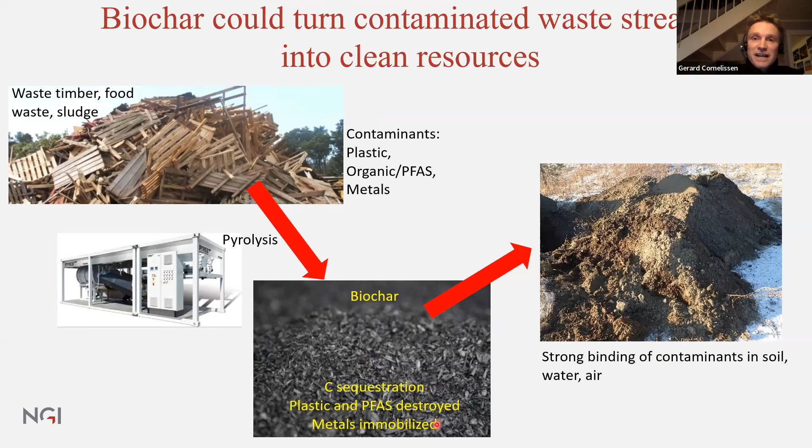There's a lot of organic waste in Norway, and it won't be different in the US, only you can multiply the numbers by 100 probably, because we only have 5.5 million inhabitants. Waste timber, surprisingly, is 660,000 tons per year for only 5.5 million people. Garden waste, we have a lot. Forestry residues, even more, but more or less clean.

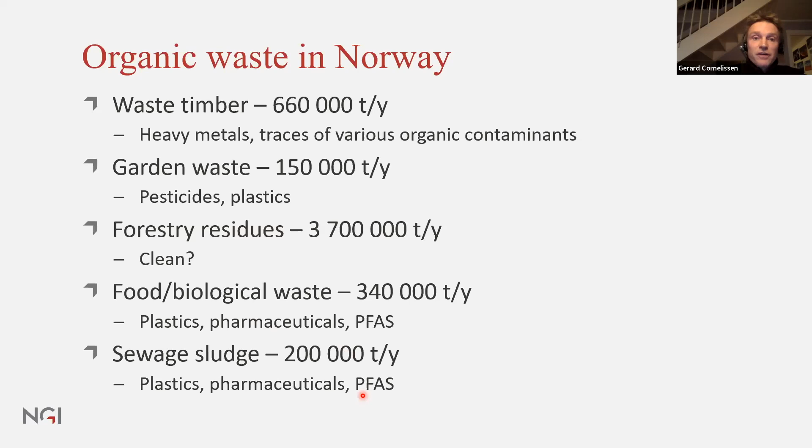Food and biological waste is 340,000 tons per year, also including plastic, pharmaceuticals, and PFAS. The same is true for sewage sludge, of which we have 200,000 tons per year, and that is getting more and more problematic once we find out how problematic these PFAS compounds are. I will show you how problematic it actually is to spread sewage sludge on your agricultural soil. You should definitely not be doing that. It's not a good idea.

This is the project that we got, the VOW project, which stands for Valorization of Organic Waste, VOW.

So inspiring that Paul's company was called after the project acronym.

That's great. We want to make that organic waste into sustainable products, biochar products for cleanup of contaminated water, soil, and air. So plenty of partners, even one American partner, University of Florida, that's Andy Zimmerman in Gainesville.

I want to mention the Technical University of Denmark, top one in the world when it comes to LCA. They will do an LCA of pyrolysis treatment as an alternative treatment to regular practice for these various organic waste fractions: garden waste, waste timber, sewage sludge, and food waste. Subjected to pyrolysis, then you get biochar, syngas, and bio-oil.

Nothing new for most of you, I think. The biochar then you can use for water and air treatment, for treatment of contaminated soil, soil improvement, climate change mitigation, and also treatment of waste before landfilling it.

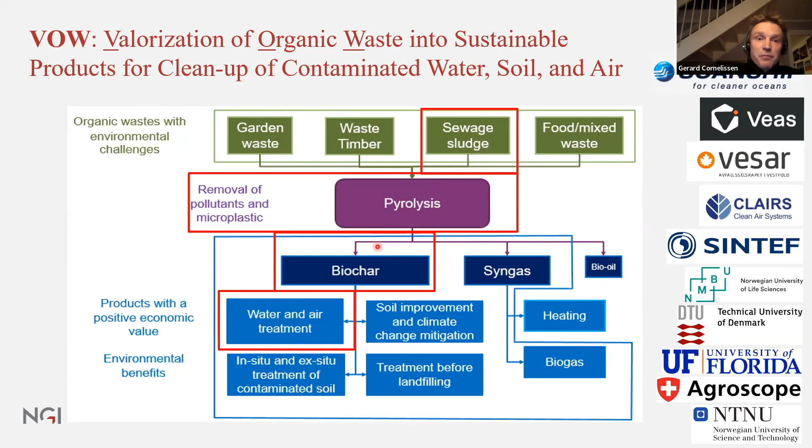The syngas you can use for heating and for obtaining biogas. The main focus of this talk and of our project is then the sewage sludge pyrolysis, biochar, water and air treatment value chain.

I will have to give you a little crash course on PFAS, 5 minutes. I'm teaching in the subject, so it's very nice to share that knowledge. These so-called forever chemicals—what is so bad about them, and why are they such a big threat to our food and drinking water? This is the general structure for the non-chemists of you.

The carbons are at these intersections, so it's 1 to 8 carbons. This is an 8-carbon carbon chain. All the hydrogens have been replaced by fluorines—that's why you call it perfluorinated, meaning totally fluorinated. And then you have this sulfonic acid head group. So basically all these PFAS compounds, which is the joint name for all these compounds, have a hydrophilic head group and then a tail which mostly consists of carbons and fluorines.

Here is also a picture of the Oslo Airport firefighting training area, because firefighting foams, especially the old ones—now forbidden—are a big source of especially PFAS, but also many of these other compounds.

What is very nasty about them is that they are persistent, because this carbon-fluorine bond is the strongest bond in organic chemistry, and it's very strange to the bacteria that can degrade many organic compounds, so it's almost impossible to degrade. It's almost like plastic—it will stay for hundreds of years in the environment. They're very mobile in contrast to many of these classic organic contaminants. They can spread very quickly to recipients, and they are surprisingly toxic, as I will come back to.

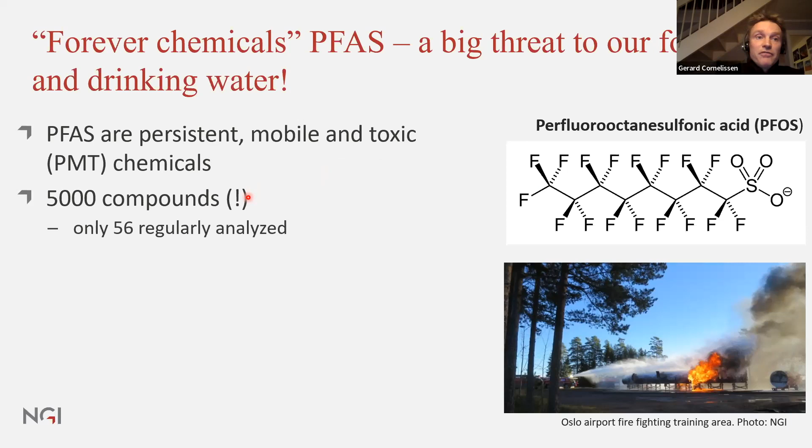So remember that name, PMT chemicals. It will maybe surprise you that there is a whopping 5,000 different of these compounds that we have emitted into the environment. That's a terrible mountain to climb in a way, to regulate and to even measure, because only 56 of them are regularly analyzed. What happened to the other 4,944 is pretty unclear. What we do know is that many of them are degraded somewhat, but then they often end up as PFOS or related shorter chain compounds.

So this is one of the kind of end products that are so persistent that they will be there forever for foreseeable periods. But many of these 5,000 compounds will actually be degraded somewhat, and it will end up as PFOS, so you see often that the PFOS dominates. The scary thing about this is that only 4 of these PFAS compounds, 4 out of 5,000, are properly regulated. And then 'properly'—we'll see about that.

As I said, they're used in firefighting foams, surface coatings—very handy if you have paper cups and paper plates, very handy with a PFAS coating, only that this stuff is so toxic. Personal care products, building materials, clothing, especially all-weather clothing, very ideal that it repels both water and stains, but then again it's so toxic. Ski wax is a very important use in this beautiful country where everybody loves Nordic skiing.

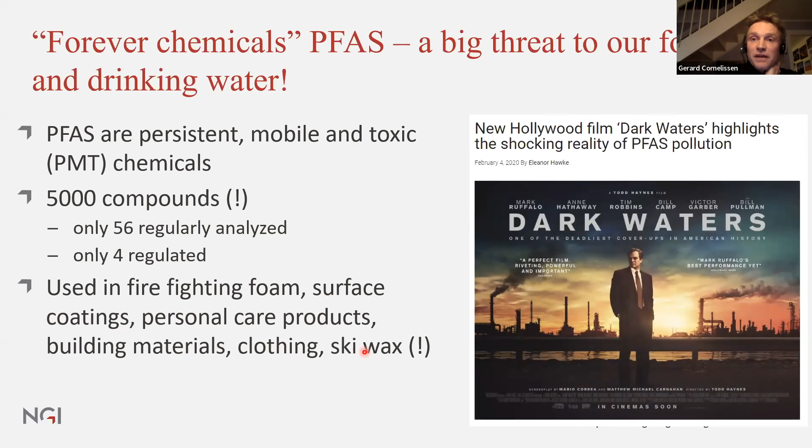So many of you have probably seen this film, Dark Waters. It's about PFOA, which is a compound that's very similar to this PFOS I just showed, only with an acid head group, but also with 8 of these carbon groups. If you haven't seen it, see it—it's pretty scary.

But we, as environmental chemists, including me, we never thought it was so bad with PFAS. That's why it got regulated so late and so little. The main reason is that the effects are so subtle. It's subtle chronic effects, mainly of hormone disruptions. For example, change in sex of alligators in the Everglades is probably explained by PFAS.

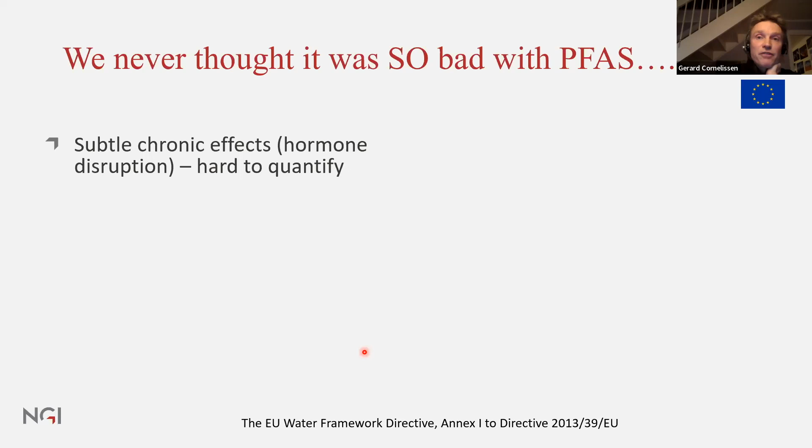But it's very hard to quantify such subtle effects. Usually we do some acute tests in water if we want to measure the toxicity of a compound, and then PFAS is not so bad. So we never thought it was so toxic on the long chronic term. But it's probably the main reason that there's hormone disruption, a severe reduction of human fertility. We can discuss how bad that actually is, but probably PFAS is the cause.

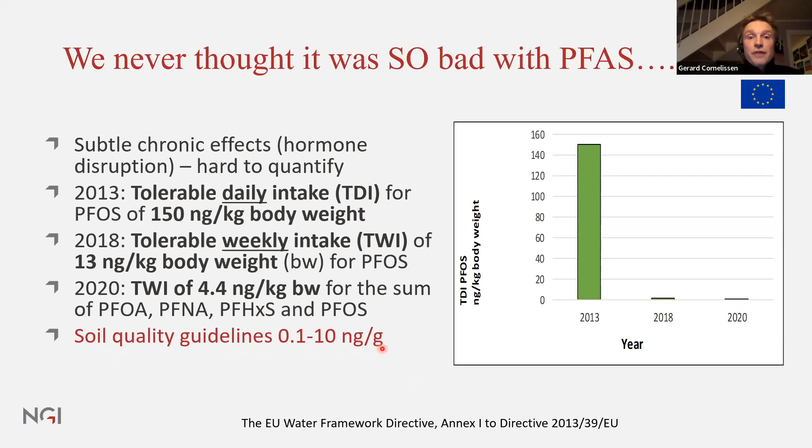Came down a lot because we discovered the toxicity of these compounds was actually much, much higher than we initially thought. Number to remember: the soil quality guidelines in most countries that have guidelines for PFAS at all are in the order of 0.1 to 10 nanograms per gram soil. So that is part per billion, which is still pretty low.

To sketch the crisis and how big this problem is, we have the serious PFAS crisis in my country of origin, the Netherlands. Before 2018, this chronic toxicity was finally quantified. So then the regulators in the Netherlands got startled. They want to be best in the world to regulate such chemicals. So they set a toxicity-based upper limit for PFAS of 0.1 nanograms per gram for reuse of soil.

But they never thought that benchmark would be exceeded in every single building project. So in every project, they got a problem and they needed to stop because they needed to analyze and remediate PFAS. So the whole building sector stopped, and that made them block, in fact, government buildings. This is the middle of The Hague, the government site in the Netherlands. They're blocking everything, and they're just very angry because the whole building sector was coming to a grinding halt because of these PFASs.

So yeah, that was not so much fun, of course. So then they temporarily eased those rules, not based on toxicity, but based on practice, to 8 nanograms per gram. So that's a bit the background of these values.

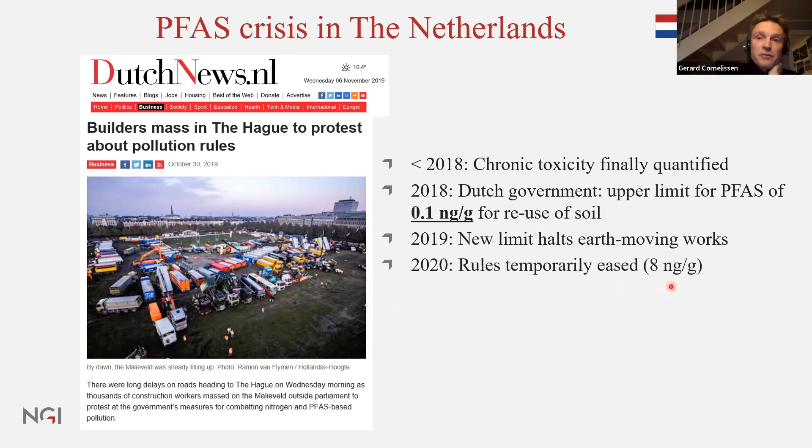But remember that number, that 0.1 part per billion nanograms per gram is in fact problematic already. And if you want to regulate, you need to be around 10 parts per billion nanograms per gram, because these numbers are coming back in the presentation.

So the important questions we were posing in the WOW project are: what is the fate of PFAS and also metals during pyrolysis? And can you use sludge-based biochars for PFAS remediation to go down to these numbers? So then the idea is again: sewage sludge to biochar, PFAS destroyed, metals bound. You use it as a remediation agent, so it sorbs the PFAS, and then if you use it for wastewater treatment, you might be able to regenerate it, get out the PFAS again, and reuse as biochar.

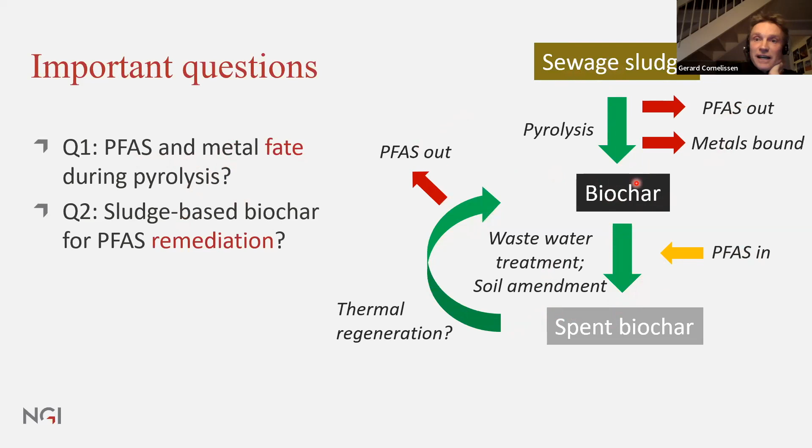So what is a sorbent? Many of you have maybe not heard of that term. It's a material that binds a contaminant very strongly. Usually activated carbon is used, but as you will see in this presentation, biochar can be at least as good as activated carbon. And then of course you have valorized basically a product with negative value if you make it from sewage sludge. Some current uses of sorbents are in wastewater cleaning, landfill leachate from landfills, drinking water treatment, air filters, and then soil remediation.

So how does that work for water cleaning? For example, you have these fluidized bed flow-through systems where below a membrane, you have an activated carbon or biochar slurry, and you have the water going in, flowing through that fluidized bed, going through the membrane, and then much cleaner water is flowing out of the outlet. So that's one of the ideas that this biochar can be used for.

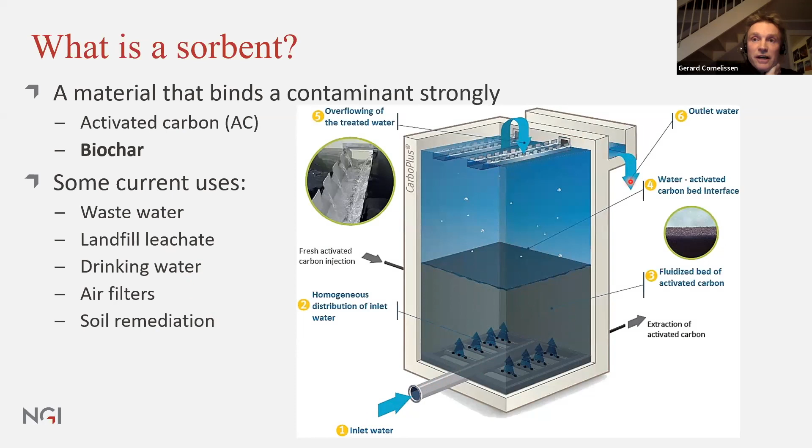In soil remediation, it looks like this, referring to the IBI white paper from a few years ago that I wrote together with my colleague Sarah Hale.

You put the biochar into the soil and you get a transfer of PFAS from the soil particles to the biochar particles. PFAS is very mobile in soil because it doesn't bind strongly to soil particles, but it does bind strongly to biochar particles if you add the biochar for this purpose. The idea is that the PFAS binds so strongly to the biochar that hardly anything leaches anymore. And if it doesn't leach, it cannot be taken up by plants or animals, because they can only take up PFAS through the water phase. So if it doesn't get released from the biochar, it poses no risk anymore to the biota.

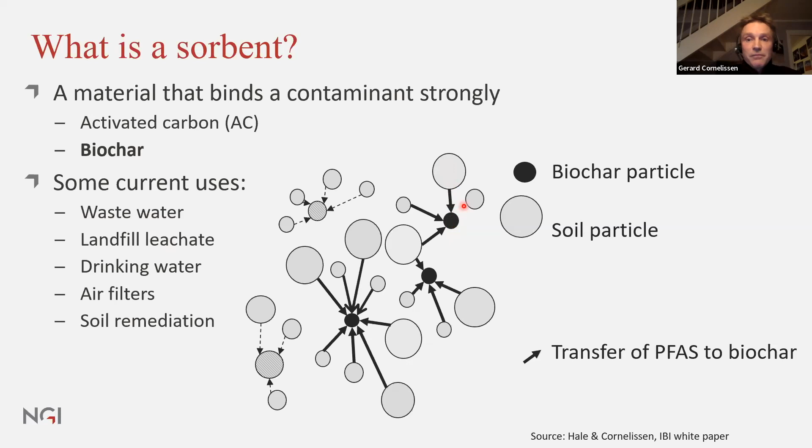That's the whole idea. So then we pyrolyzed some of these sludge fractions. Paul will tell you much more about this technology, but very quickly, I have to cover some principles before presenting the data. Pyrolysis up to 800 degrees. What's important to note is that there was combustion of the syngas with propane between 700 and 900 degrees. Then we measured the PFAS and metals, both in the biochar and in what was coming out of the chimney, after the combustion chamber with propane and after the condenser where the syngas was condensed. The pyrolysis reactor was electrically heated.

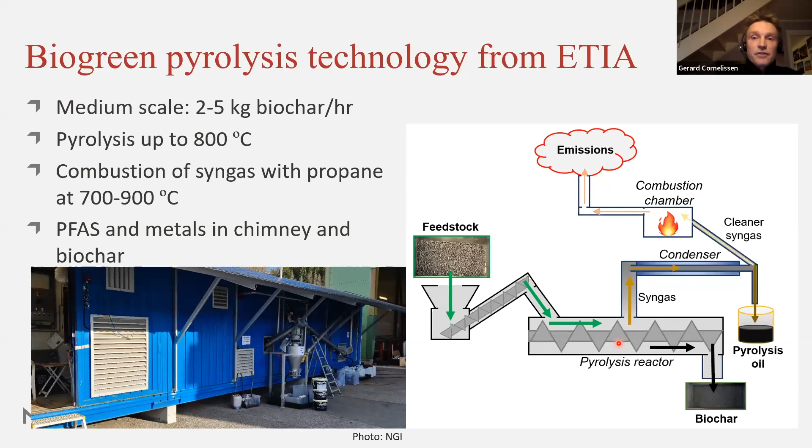So question 1A is: does pyrolysis remove PFAS?

First, we had to analyze how much PFAS there was in the sewage sludges. We found, not really surprisingly, that sewage sludge contains a lot of PFAS. Remember that 0.1 nanogram per gram number above which a soil is toxic. For example, digested sewage sludge number 1 had 56, digested sewage sludge number 2 had 441, lime sludge had 340, and interestingly, a raw dewatered sludge from Oslo Airport watershed had 214.

That's about 100 to 1,000 times higher than what can be expected to be toxic. This is the percentage of various PFAS compounds we identified. Sometimes the 4-carbon PFBA, butyric acid, is dominant. Sometimes the pentanoic acid with 5 carbons is dominant. It varies a bit, but there's a wide range of sources and distribution patterns, and definitely not a good idea to put this directly on soil, as is current practice in many countries, I have to note.

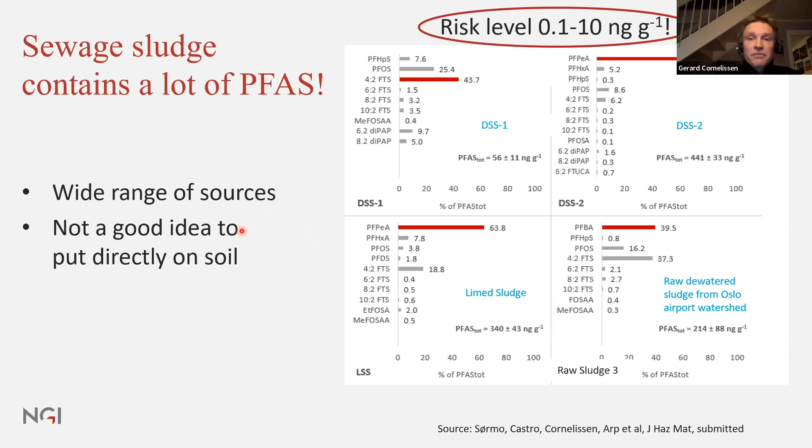But the good thing is, if you pyrolyze that, there is only residual PFAS in the biochars. Many people claim they get rid completely of the PFAS, but then they don't analyze well enough, because it's quite difficult to analyze PFAS at these very low amounts. But as I said, we had the best lab in Norway on PFAS, at NTNU University in Trondheim. More than 95% of the PFAS is gone, so that is really good news.

So: 10 to 1,000 times lower PFAS, 60 to 100% fewer congeners, and 97% of the remaining PFAS is longer chain. The short chains are cracked, destroyed. That's good.

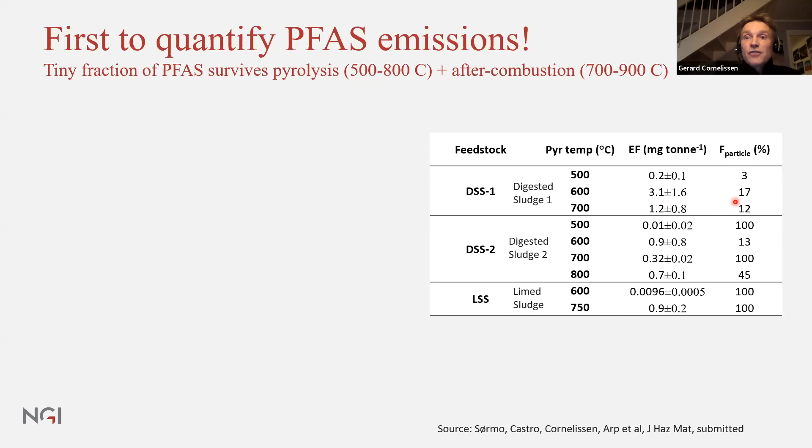Milligrams doesn't seem like much, but if you know that nanograms per gram is already problematic, then these emissions aren't trivial, so you should do something about it. The fraction in particles is variable—sometimes it's quite easy to remove with a scrubber or filter, but in some cases relatively little is in the particles, so it's all in the gas phase and more difficult to catch.

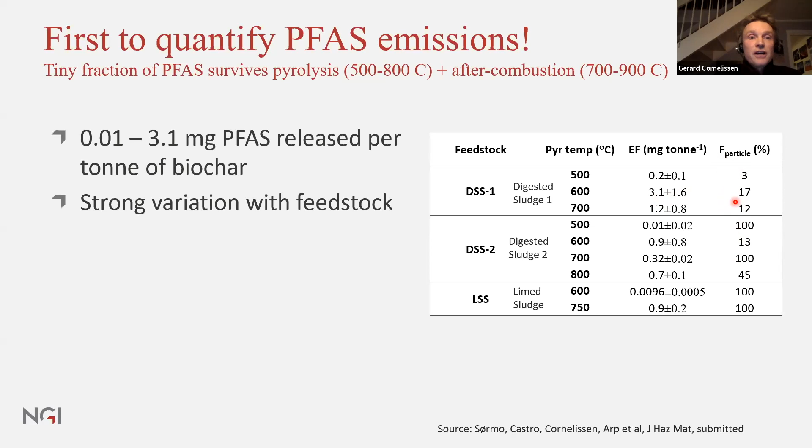So 0.01 to 3 milligrams of PFAS released per ton of biochar, with strong variation depending on feedstock and temperature, and part of the emissions is particle-based, where a filter or scrubber will work.

But we have an uncertainty around non-quantified degradation products. We quantified 56 compounds, but as I told you, there are about 4,900 more. Nobody in the world can analyze all of them, and that's a worry. We do as best we can, but we're not there yet.

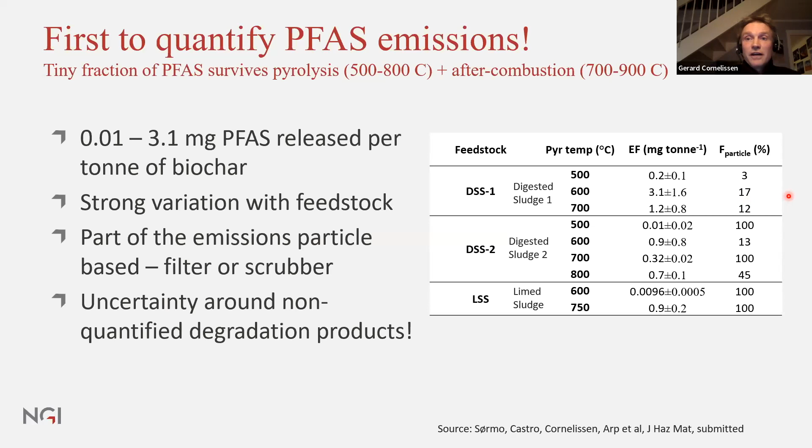This is the mass balance for PFAS, more than 95% degraded, as I said. This is for digested sludge: decomposed is the green, 95.5%, about 3% is emitted, and about 2% you'll find in the biochar. This is the best case, digested sewage sludge at 700 degrees—99.97% decomposed, 0.03% emitted, 0.00% in the biochar. That is what we want, but we don't always achieve it. So we need to find out when we achieve this consistently, and not the case with 3% emitted.

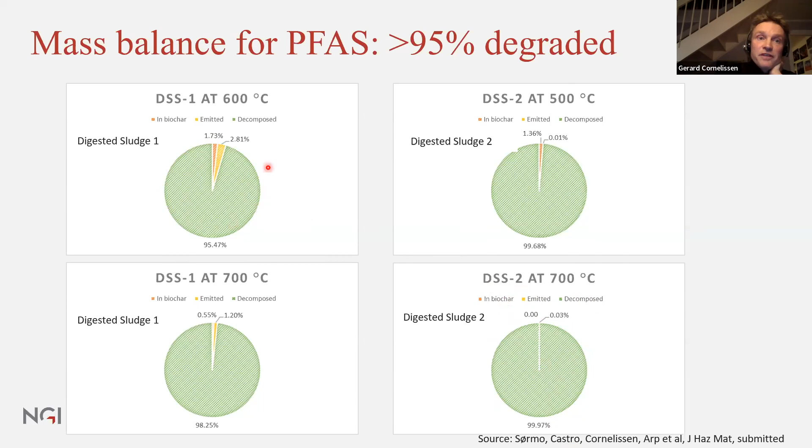So question 1A: yes, I think we can crack the PFAS, but we need to be careful. That's the answer. Question 1B is, does pyrolysis immobilize the metals? I'll be quick on that since we want to focus on PFAS, not so much on metals, but still, arsenic—I'll give a few examples.

You have these European Biochar Certificate guidelines with high and low values. For arsenic, most of these sludge biochars are above the EBC low but below the EBC high risk limit, somewhat independent of temperature.

We leaching-tested the biochars at ambient pH, around 8 to 9, and then buffered them to pH 5 and pH 4 to see whether soil acidity would leach these metals out if applied to soil. You see two things clearly: the leachable fraction is very little, less than 2%, even at 500 degrees. And if you elevate the temperature to 800 degrees, almost nothing comes out, not even at pH 4. That's really good news—if your temperature is high enough, almost none of your arsenic, quite a toxic metal, will come out, even at pH 4.

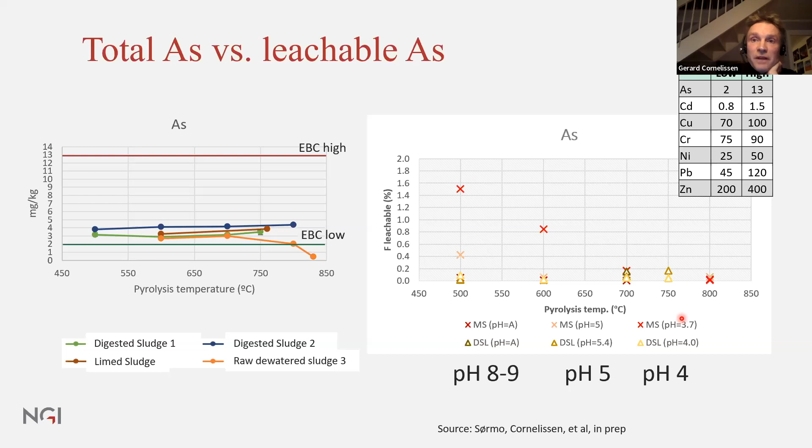Copper is another case—too much copper in all these biochars, all above the EBC high risk limit of 100 milligrams per kilogram. But again, leaching tests at low temperature show only about 1% leached at low pH, while at high enough temperature less than 0.1% leaches. Zinc shows the same picture—problematic with regard to EBC guidelines, but leaching tests show less than 10% will leach, a bit more than the others. Still, if the temperature is high enough, you get back down to 1% at ambient pH, maybe 0.1%. So only a little will leach, and at high pyrolysis temperature, even a low pH doesn't matter—you won't get these metals out.

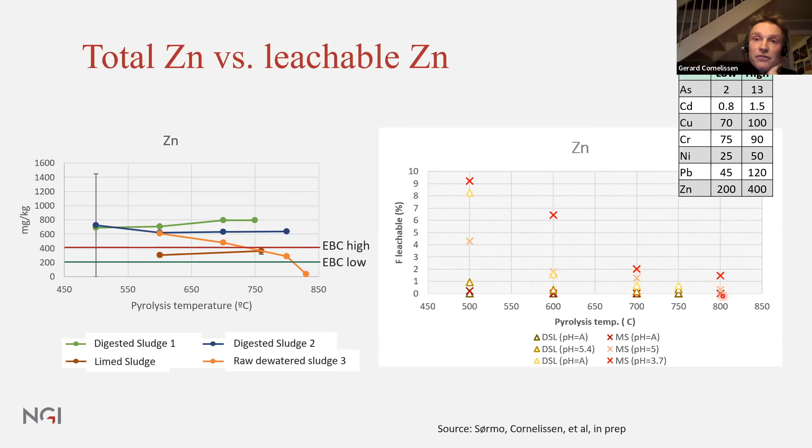We also did emission factors for the metals. This is far too complicated a table for a quick presentation—I apologize for that—but at least we have the numbers, and they will soon be published.

You see here there's quite a lot of chromium, nickel, and lead emitted. For example, this waste timber biochar at 800 degrees gives 138 milligrams of lead per ton—you don't want that in the environment. So you will need a scrubber or something to clean it, or you'll have a certain allowance of emission budgets if doing this on an industrial scale. But the good thing is 70 to 100% is retained in the biochar, and we've shown that the part retained in the biochar is not so problematic, fortunately.

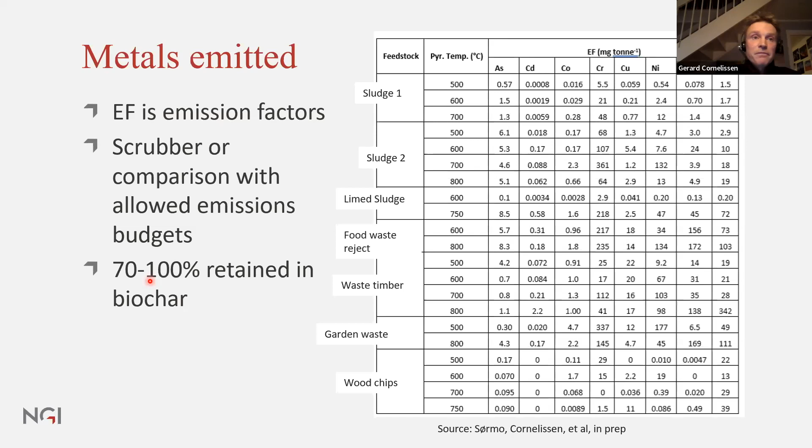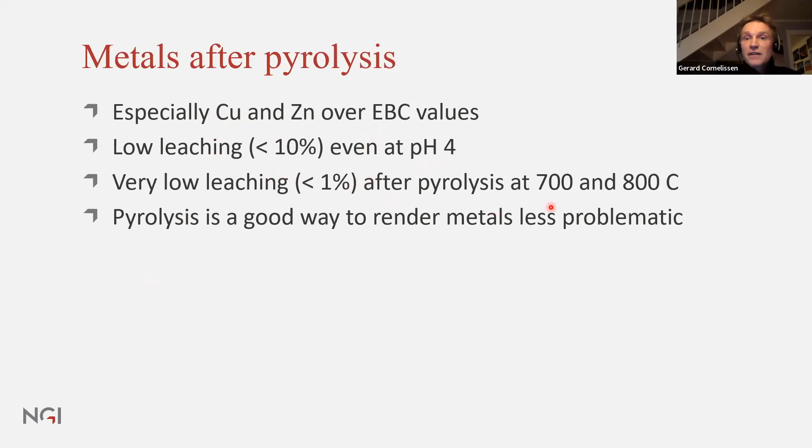Summing up: especially copper and zinc are over the EBC values, but there's low leaching, even at pH 4—very low leaching after high temperature pyrolysis. Pyrolysis is a good way to render these metals less problematic.

Okay, then the most exciting part about the presentation and our findings is that yes, sludge-based biochars are good PFAS sorbents. I've worked in this field for about 20 years on strong binding of organic pollutants to highly sorbent carbonaceous particles, and even this surprised me as an absolute global expert in the area. So it's quite exciting results, in all modesty.

Talking to the USA, we don't have to be so modest. In Norway, you always have to be modest, I can tell you.

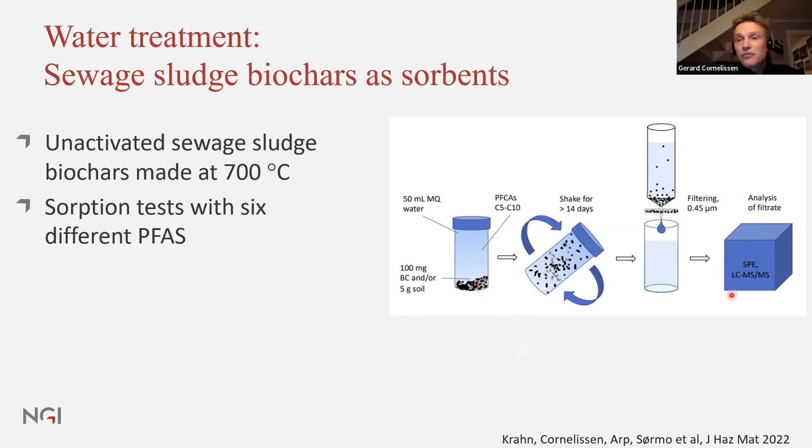Anyway, in water treatment we tried using these sewage sludge biochars as so-called sorbents. We had unactivated sewage sludge biochars made at 700 or 800 degrees centigrade, and we did sorption tests or binding tests to the biochar with 6 different PFAS compounds. An excellent master student called Katinka Krahn did these experiments. She made simple systems with the biochar in water, shook that for 14 days, filtered it, and measured the PFAS in the eluate with very advanced LC-MS analysis methods, again at that top university we have in Trondheim. So what she saw for the first time is that sewage sludge biochars are better than wood-based biochars and almost equal in performance to commercial activated carbon, and that I should say is no less than sensational.

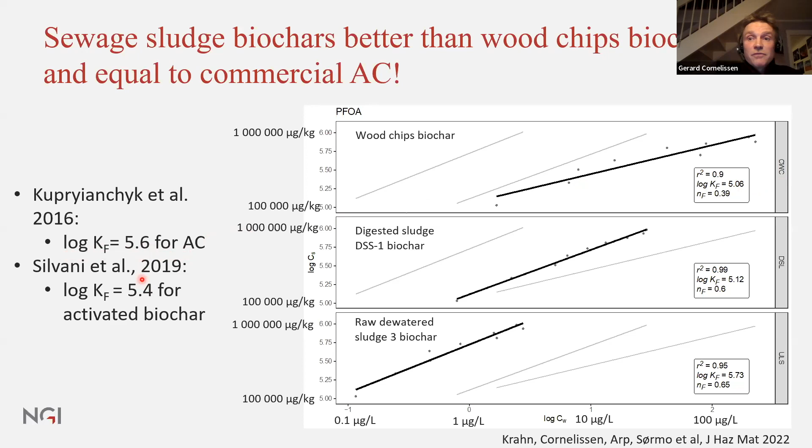We also did soil remediation experiments. There we added waste timber biochar, which was activated, to 2 different soils, also from a firefighting area at another airport in Norway, Rygge Airport. It's a regional airport where they have huge contamination problems with these PFAS compounds. We had a low TOC soil, very mineral with almost no organic carbon, and a very peaty high TOC soil with 34% organic carbon. We had various degrees of activation.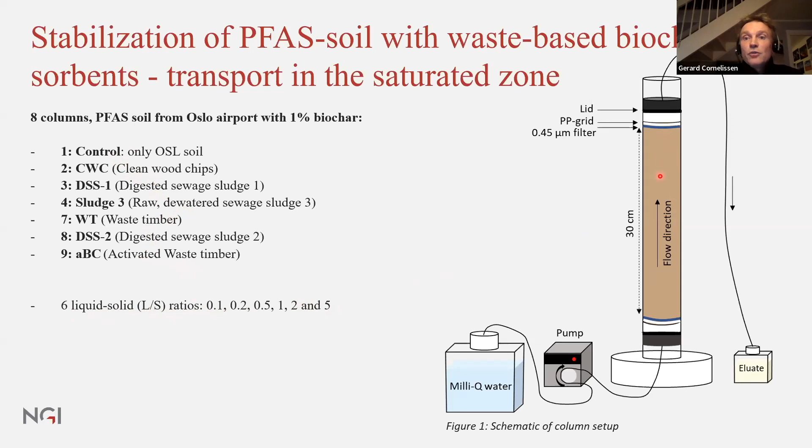We measured that at 6 liquid to solid ratios, 0.1 to 5. 0.1 means you just take the first flush basically of the water coming from this soil, and then you keep on pumping.

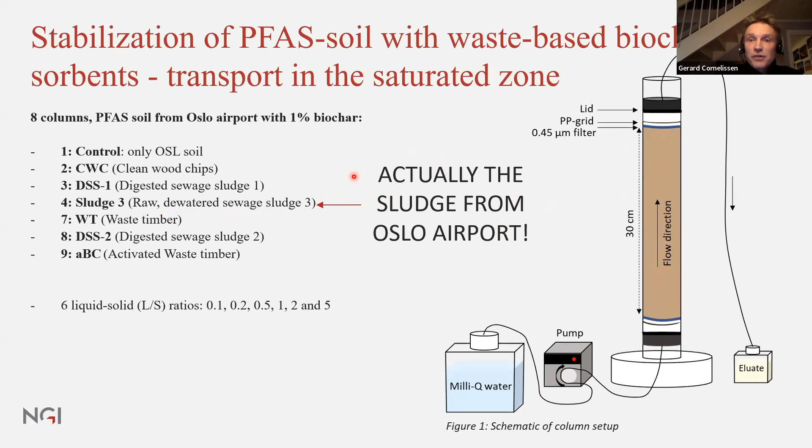The elegant thing here is that we had PFAS contaminated soil from the firefighting training area at Oslo Airport, but we also used the raw sewage sludge from the very same Oslo Airport, which is PFAS contaminated because of this same contamination source. So it's quite elegant that we use the sludge which is PFAS problematic because of the same problem to remediate the same soil, which is also from Oslo Airport. It's a very nice example of circularity, we feel.

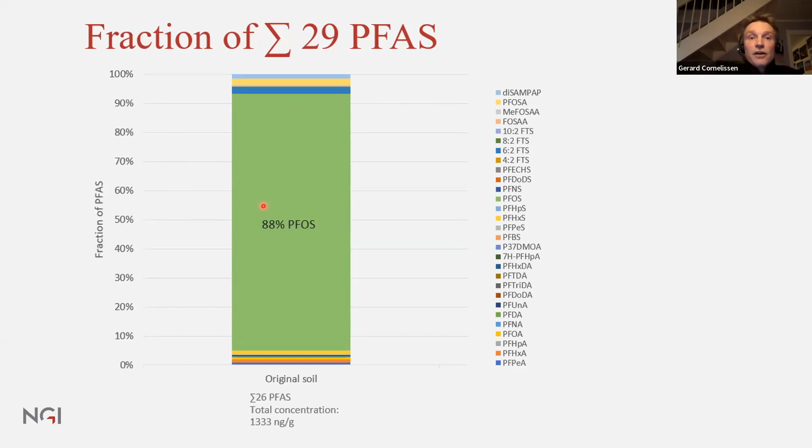Again, 29 different PFAS we identified of the 56 we tried to measure. 88% was PFOS, so that underscores PFOS is abundant in this firefighting foam, and also a lot of these bigger PFAS compounds are degraded to PFOS. So in the end you often see a lot of PFOS, but you also see a lot of the other compounds. Here the total concentration in the soil was a whopping 1,333 nanogram per gram. Remember that 0.1 nanogram per gram is toxic in the Netherlands and everywhere else.

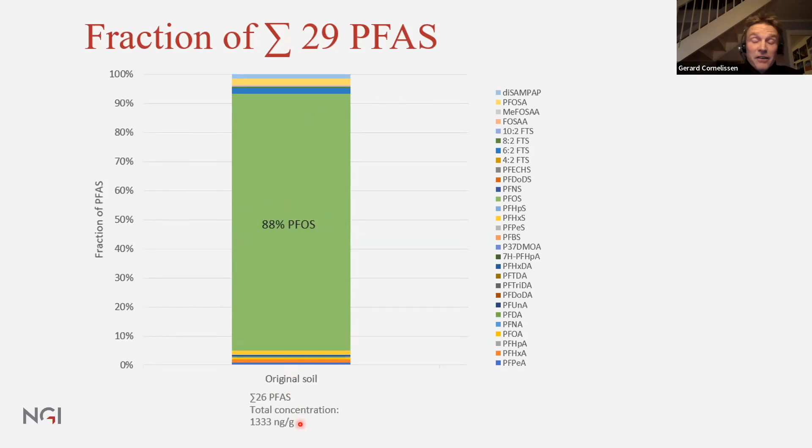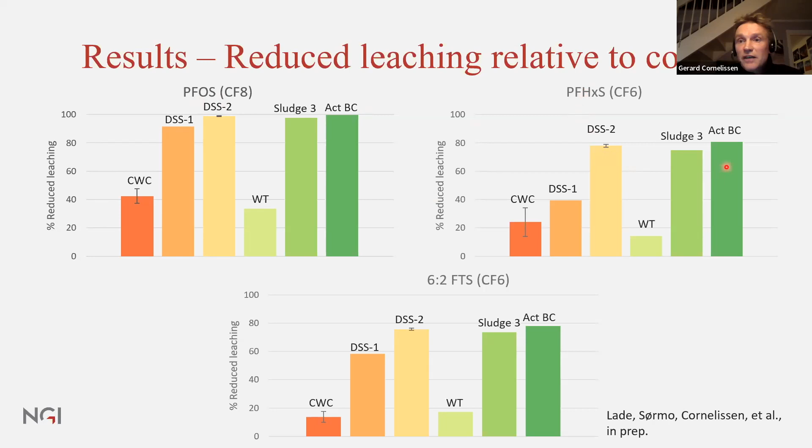So this bar diagram shows the percent reduction in leaching compared to the control. You see the clean wood chips biochar and waste timber biochar not so good, less than 40% effectiveness. But you see these two sludge biochars and the activated waste timber biochar, almost 100% effectiveness for this most ubiquitous PFAS compound, the PFOS, the octanyl sulfonate, the C8 sulfonate. For the C6 sulfonates, slightly less effective, up to 80%, but still the same pattern, with these 3 being the best sorbents. Same again for the 6,2-FTS.

But what I wanted to show you is this CF5 compound, CF5 acid. There you see the effectiveness is quite a bit less, only 40% for these 2 sludge biochars. So if you want to do something about this compound, you need to add more biochar. It all boils down to knowing what compounds you are looking at and what benchmark you want to achieve. Unfortunately, this is not even one of the regulated PFAS, so in practice people will not worry enough about it.

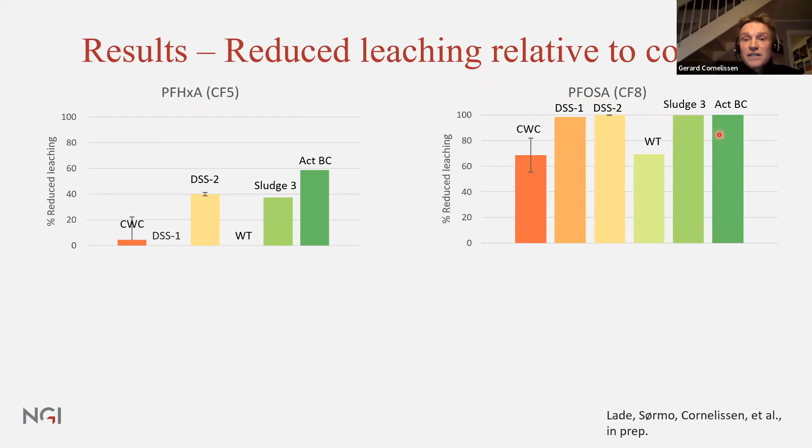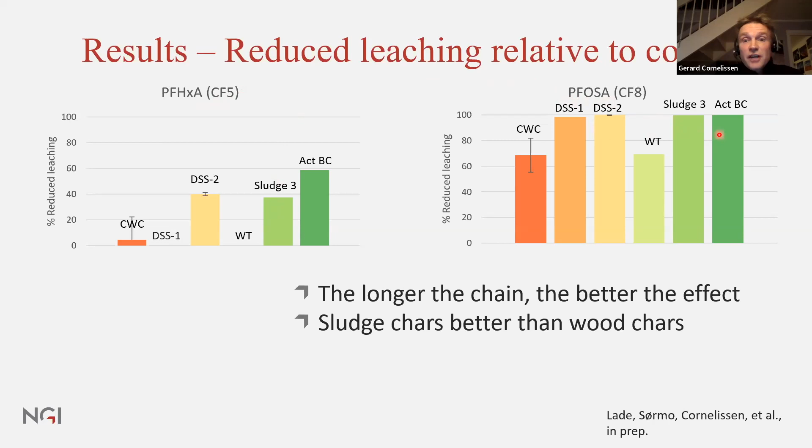But for this other one, PFOSA, almost everything is gone, almost 100% reduction in leaching compared to the control. So basically, the longer the chain, the better the effect. That's no surprise regarding the sorption mechanism of biochar. Sludge chars are better than wood chars - that was an enormous surprise, but it can be explained, as I will show in the next slide. And this activated wood biochar was the best, made by the Ithaka Institute.

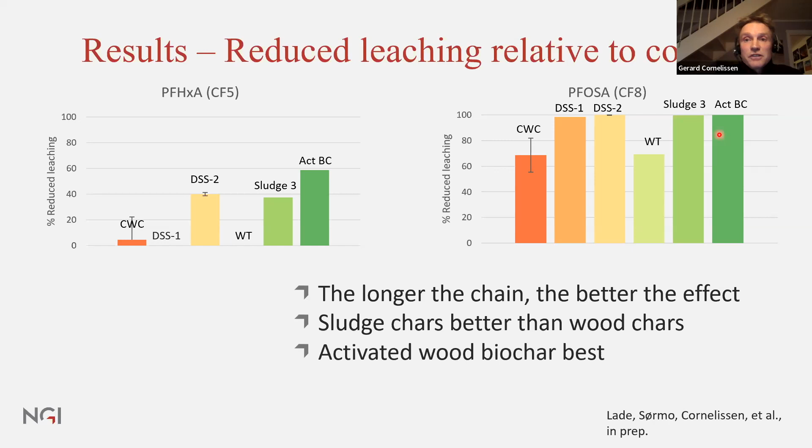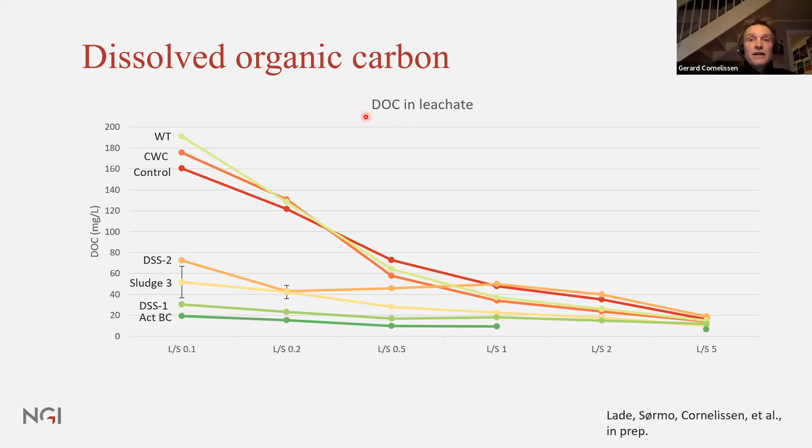So this sums up the column experiments of our student Clara. Activated waste timber showed 99.8% reduction of PFAS leaching. Raw dewatered sludge from the area showed almost 99% reduction with only 1% biochar addition. Digested sludges also showed over 90% reduction in PFAS leaching, but the effect was much less for the clean wood chips biochar and the waste timber biochar, approximately 30 and 40%.

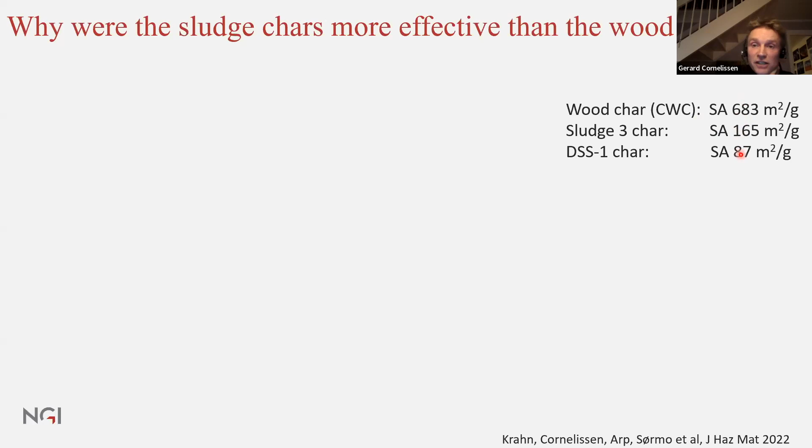So why were these sludge biochars more effective than the wood biochars? That surprised us, but not anymore, because we could explain it with the help of Andy Zimmerman at Florida University in Gainesville, who measured surface areas. At first, we got the surface area, which was much higher for the clean wood chips biochar than for the sludge biochar. That puzzled us. But then we started to look at the pore size distribution in relation to the size of the PFAS compounds.

Here you see the ultra nanopores. That's really small, below 1 nanometer, which is 10 to the power minus 9 meters, so a millionth of a millimeter. These are the very narrowest pores. You see that the wood biochar has much higher pore volume, PV being pore volume in cubic centimeters per gram, than these two sludge biochars.

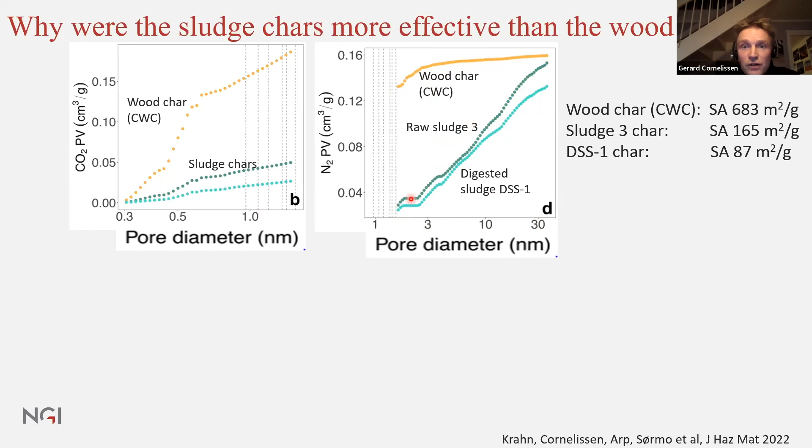But if you look at the larger pores above 2 nanometers, between 2 and 30 nanometers, the wood biochar doesn't have much additional porosity anymore in this size range. Whereas the raw sludge, number 3, which sorbs so well, still has a lot of porosity between 2 and 30 nanometers. It turns out that PFOA, the DuPont problem molecule that our student Katinka did her master's on, is 1.4 nanometers long and 0.6 nanometers wide, and you need at least about 2 nanometer pores to accommodate this compound—otherwise it simply doesn't fit.

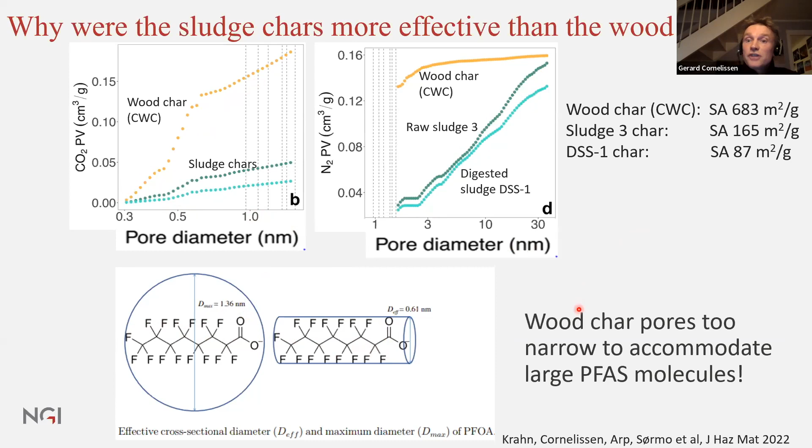So all these small pores are very much represented in the wood biochar, but they're worthless for PFAS binding. It's the pores above 2 nanometers that nicely accommodate compounds of this size. We think that quite elegantly explains why the wood biochars were disappointing—the pores were simply too narrow to accommodate these large PFAS molecules.

So the overall conclusions, very quickly: 95% of PFAS is decomposed during pyrolysis, which is very good news. Some PFAS are emitted, less than 3%, but we still need to be careful if we do this at large scale. Metals are mainly immobilized, which is good news, but we should also take some care for metal emissions. And sewage sludge biochars can be valorized as effective PFAS sorbents—there's no doubt about that. That's our big discovery, I should say.

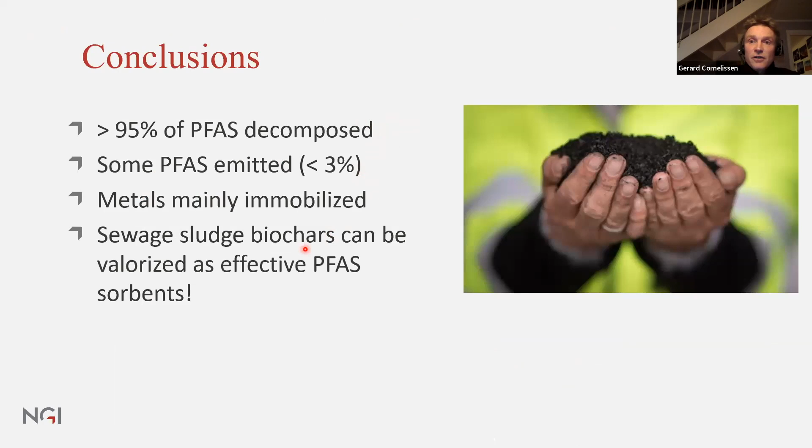One project was the WOW project I mentioned already, financed by the Norwegian Research Council in a joint industry sustainability call. The other project is led by my colleague Hans-Peter Arp, in the environmental research call of the Norwegian Research Council. It's called Sludge Effects, and the idea is to remove hazardous substances in sludge and plastic waste through various types of thermal treatment, including incineration as part of that project.

This is the crew that made it all possible. This is the Sørmo guy you saw many times, this fantastic PhD student. This is the guy you will hear speak next—that's Paal.

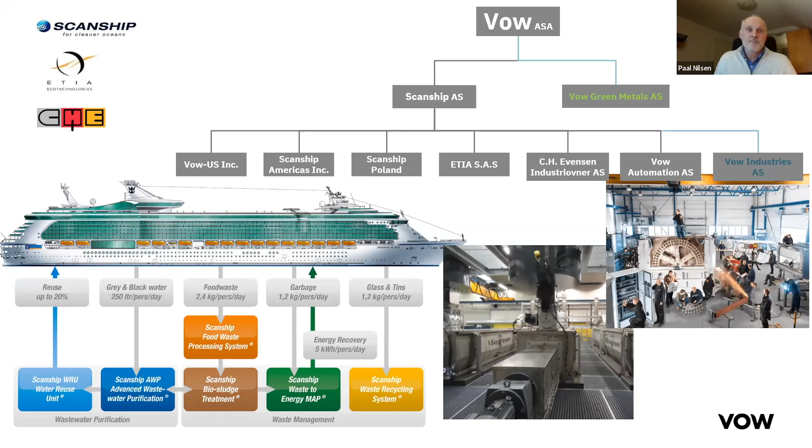We have developed a microwave-assisted pyrolysis system for cruise ships. It was installed this year. We are doing commissioning this year, and it will go out sailing in the autumn, handling wastewater, sludge, and food waste from 10,000 people on board the ship.

So you could see the reactor where we have the microwaves coming in, heating up the sludge coming from the top. Then we have a transport screw, an activation screw, where we can heat it further up if you like. The gas comes off at the top, and we pull the char out through a water bath to keep it safe and sound and for storage on the ship.

The wastewater treatment plant has an organic loading typically equal to 50,000 people equivalents. So it's almost a small city worth of sludge and food waste that we are treating there. And we will typically produce a ton of char a day when this is in full operation.

This picture is from the same test site as we have done all other tests, and a lot of the emission tests that we have done together with the Norwegian Geotechnical Institute and Gerard and Erlend is from this plant.

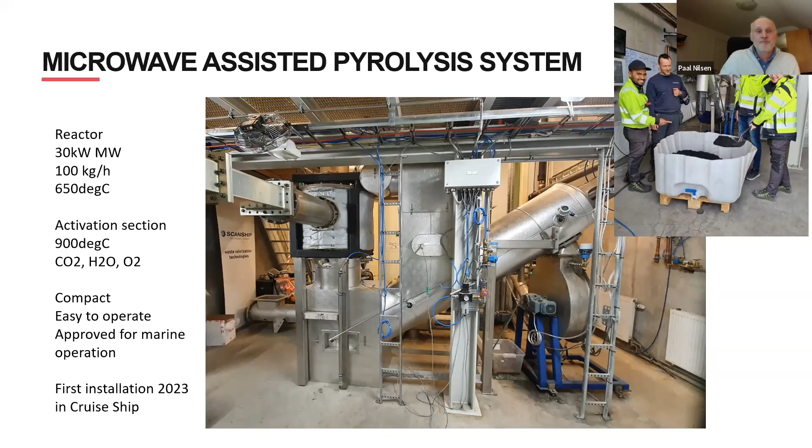And this is the technology we have used on the chars that Gerhard just talked about. A standard machine would typically handle a ton of biomass per hour and can produce some 200 to 250 kilos of biochar per hour.

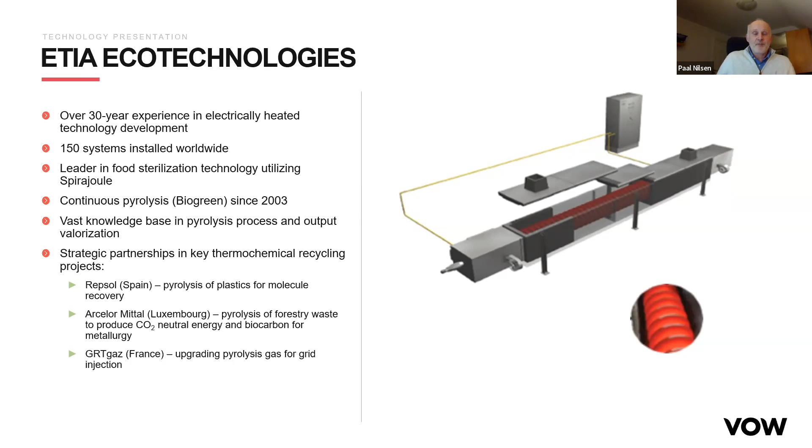And then the third technology that we now acquired and developed together with C.H. Evensen is a rotary drum type of reactor. We are now building a new machine. You could see the happy crew here with the drum.

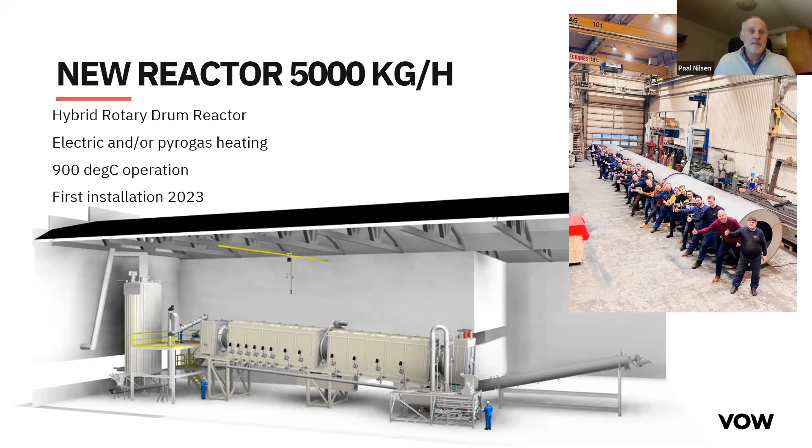So we are building now a new machine that can do a ton of biochar per hour, or 5 tons of biomass. This is a hybrid machine that could run on electricity or on pyrolysis gases. It's also serviced for 900 degrees, so we can really come up to temperatures that are relevant for the properties of the char that Gerhard was talking about. Two weeks ago, I was together with these guys, and I was inside the combustion chamber here. So it's really picking up and is soon to be ready.

I'll flip through some examples of what we are doing on biomass, in particular with the BioGreen technology. In Sweden, in Helsingborg, we are putting up a machine now. It's starting up this week, and it will process garden waste and green waste from the municipality to make biochar for agronomic purposes.

And the pyrolysis gases will be burned and produce hot water for domestic heating.

If you are lucky to go to Helsingborg on the 14th or 15th of June this year for the Biochar Summit, arranged with the Nordic Biochar Network and the European Biochar Industry Consortium, you will have an opportunity to visit this plant.

Another exciting example from the BioGreen system is the one in Hamburg, processing cocoa bean shells from a big chocolate factory. The shells go for pyrolysis, and the steam produced goes back for use in the chocolate production. We also get a very nice biochar for agronomical purposes - it's an exciting char with a lot of alkali, potassium, phosphorus and so on. So it's really a valuable resource to recover.

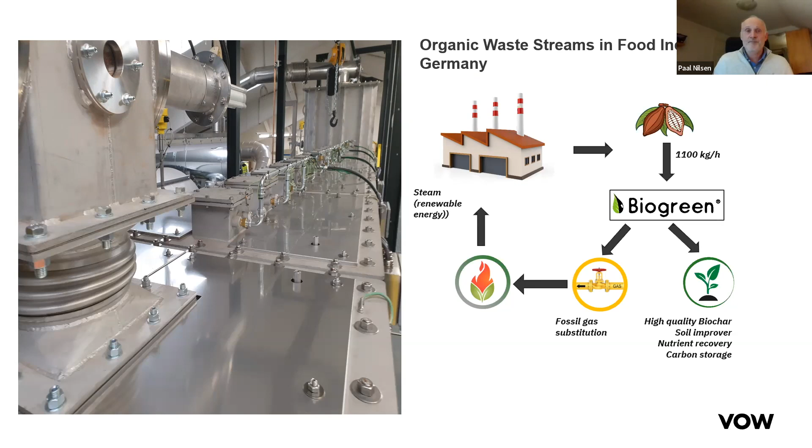North in Sweden, we use wood chips to make high-grade biocarbon for the metallurgic industry. Here we are talking about 92% fixed carbon with very little volatiles, going directly for the steel industry.

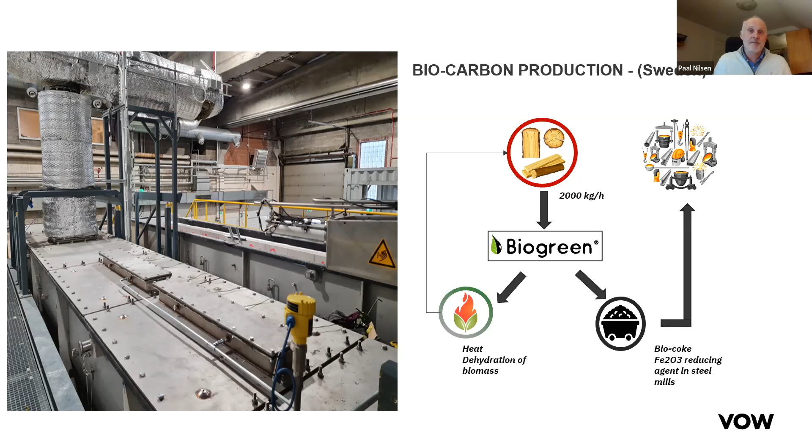Another example of waste valorization is from Philip Morris, their tobacco factory in Switzerland, where we put in place a machine to handle pallets, cardboard, and also organic residues from their own production. The steam from the pyrolysis gas is used to offset natural gas in their heating duties. In this project, we really came to terms with our skills from the cruise ship industry, where we are very used to working in confined spaces. We were allotted just a small building for the pyrolysis equipment and steam production, so we had to fit it in with millimeter precision.

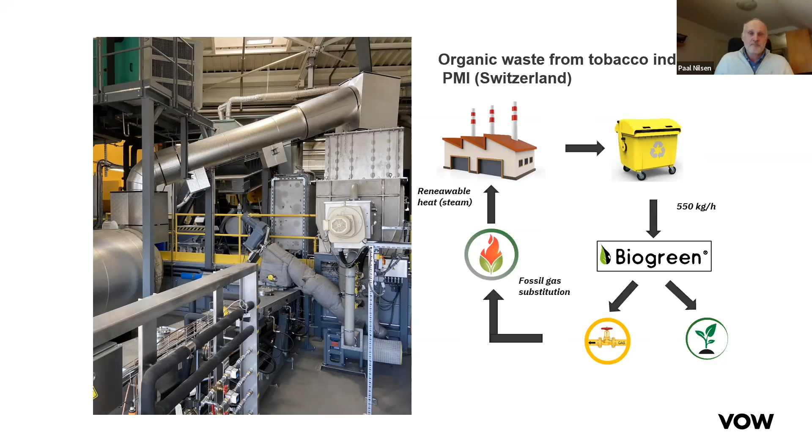Another exciting industrial venture is a pilot we're running on end-of-life tires - granulated car tires that are pyrolyzed to recover carbon black. We have developed our process to the extent that the carbon black coming out is equivalent to some of the commercially available carbon blacks for this industry. So the client is happy, and we are now developing industrial scale projects on this. We have a rather high yield in the recovery of the carbon black, and also some very interesting oils and gas for energetic purposes.

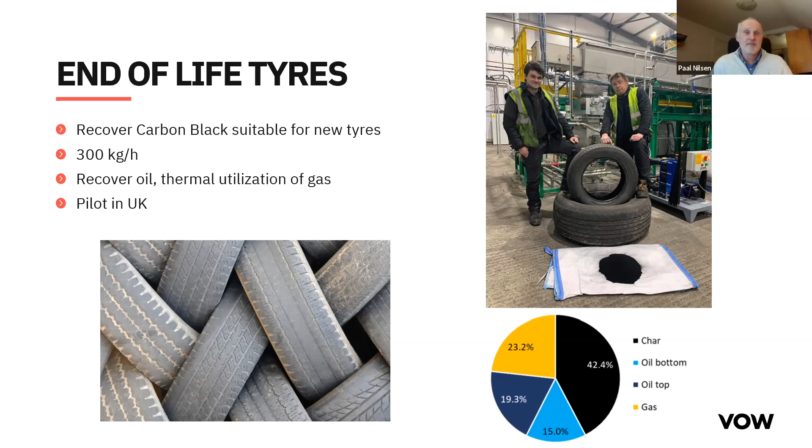For the topic of today, in Japan we have had a large pilot for some time doing dried sewage sludge pyrolysis at more moderate temperatures. Here the regulations are such that the sludge is prone to be incinerated, so now we make a high energetic biocarbon, or coal, that can go to a coal-fired power plant for heat valorization. With this client, we're also looking into developing more full-scale projects in Japan, which is very interesting. But again, their regulations limit the application of biochar for other purposes.

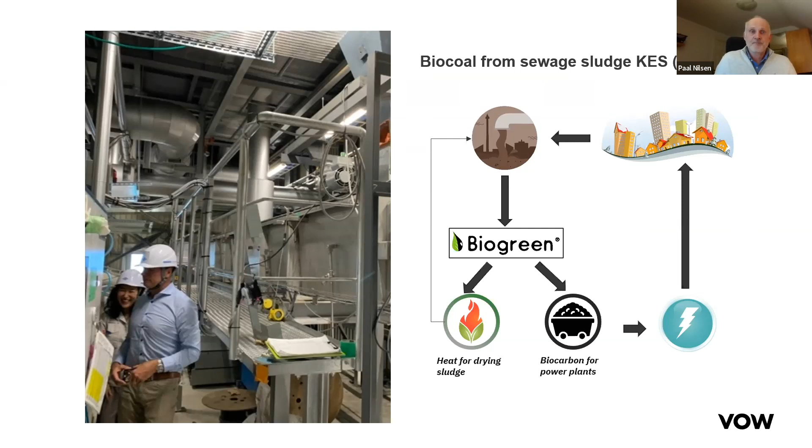As Gerhard mentioned, we have a nice testing infrastructure with our innovation lab. At the moment we are 16 people in Norway, and we have an R&D team in France. So we are very well capable of providing this type of biochar, and we connect with all sorts of research programs to get the exciting results we heard about earlier today.

We are very happy with the situation with the Norwegian Geotechnical Institute. We have had a lot of exciting long nights running tests together and doing measuring campaigns. This has been very successful, I think.

Here you can see Gudny Flatabø. She is our PhD student, running her PhD project on the integration of anaerobic digestion and beneficial use of the pyrolysis gases and condensates. We try to biologically convert the pyrolysis gases and condensates to methane, which I think is a very good combo if you are looking at doing pyrolysis of digested sewage sludge.

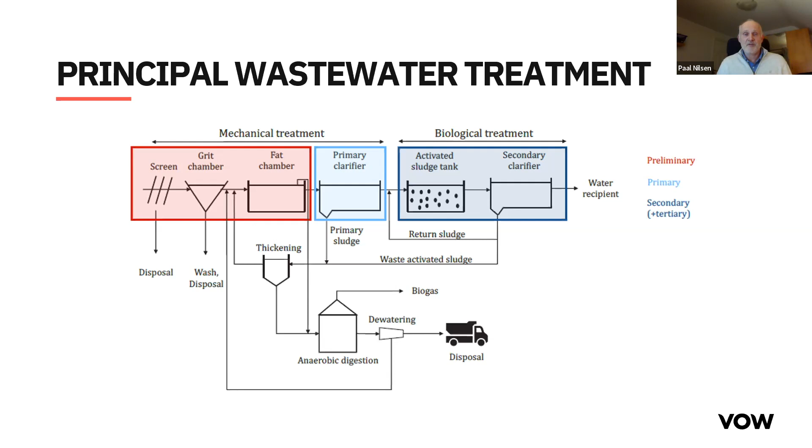We think that doing biochar, doing pyrolysis of the biosolids, getting valuable products like sorbents, and also using them actively in agricultural applications, is the way forward.

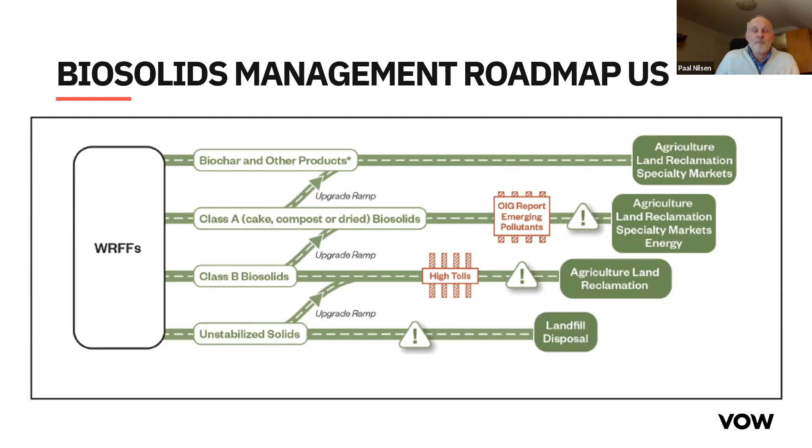There are already a number of countries now putting together rules and regulations for this. There are a lot of committees and projects working on the future treatment of biosolids. We participate in some committees in the US on the topic, and we are also invited into larger workshops, next week in UK on the same topic. We heard already from Australia that there have been such strict limits that some areas now ban the land application of this.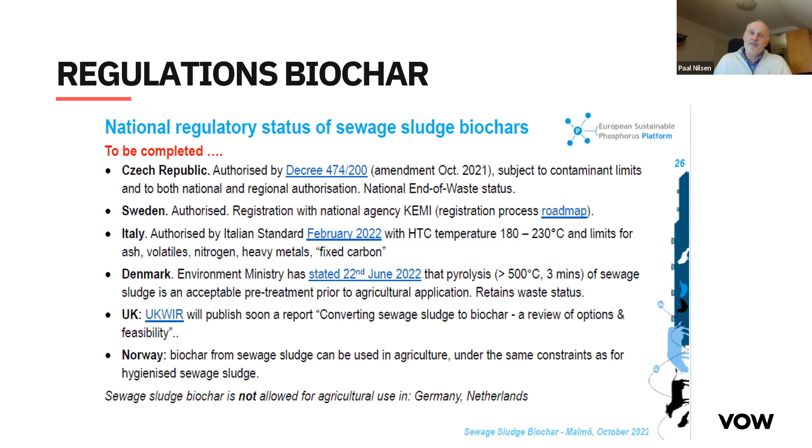So we think pyrolysis could be a good way to do it, but integration of pyrolysis and anaerobic digestion is delicate and needs to be considered carefully. This is just an example: the anaerobic digester, typically dewatered to some 25%, needs to be dried, and then you could do the pyrolysis. You could make some steam out of the pyrolysis gas to run the dryer, and you would get some biochar. So this is a typical setup. The dryer would need a lot of heat to evaporate all the water from this very wet sludge.

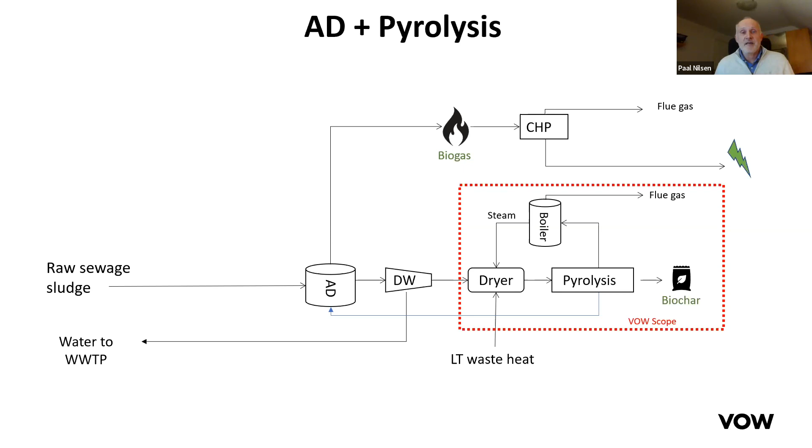In our group, Oda Kjøllaug Svennevik made her PhD on thermal dewatering of these types of sludges. In her PhD she looked into a wide variety of sludges from all over the world, from all sorts of origin, and then she compared thermal treated dewatering with non-thermal treated dewatering. Long story short, doing this type of thermal dewatering could almost double the dry solids of the sewage sludge, meaning we could reduce the drying by 50%. So this is an energetically efficient way to handle the sludge, preparing it for pyrolysis.

So what we did was put in place a thermal hydrolysis system that could handle the sludge. What you see in this slide is actually the wastewater treatment plant of the Oslo airport, the same sludge as Gerard referred to. So when you remember the picture from the firefighting testing in his presentation, that was in the wood just behind this plant. So the sludge, we tested raw sludge, not digested, but raw sludge in this case.

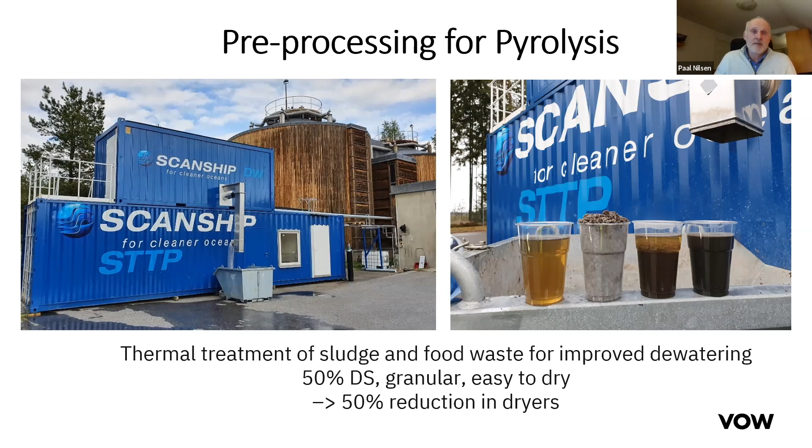Another way to do it is to take sludge, either raw or digested, to a central hub, then do thermal hydrolysis and dewatering. With thermal hydrolysis, you could typically hydrolyze up to 30% of the COD, or the energy in the sludge. This is a nice substrate for digestion, easily degradable. Then we do a dryer with much lower effort, since the sludge is already very dry. Then we can send it to pyrolysis. We can make a steam boiler to run the dryer and also to run the thermal hydrolysis.

We could also bring the pyrolysis gases and condensates to the digester. This is the PhD program Gudny is doing now. We can also take the condensate from the dryer into this type of digester, so we could recover nutrients like nitrogen, and then make biochar.

We see a benefit of bringing a combination of sludge and green waste. We enhance the energy balance, since digested sludge could have a very low energy content. Most of the energy in the sludge, or at least 50%, went to biogas, so the remaining is in the sludge. Bringing in some garden waste could increase the carbon content, and may also have synergetic effects on other properties of the biochar, which we will explore in the near future.

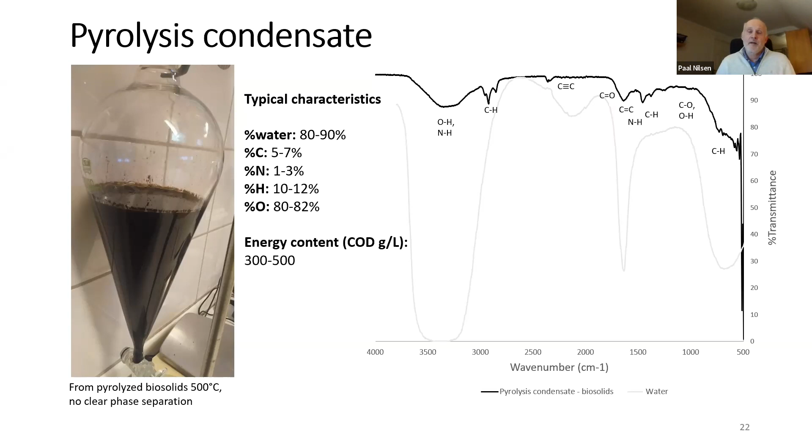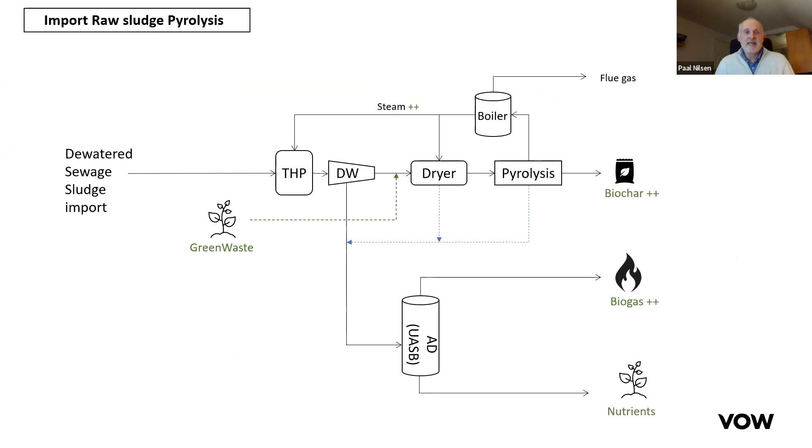So they would be converted if we put them in the right way into the digester. But the condensates are more tricky, and if we bring these condensates in, typically we would see in a full-scale digester that the condensate from the pyrolysis of the subsequent digestate would contain 5-6%, or up to 9-10%, of the in-feed COD. So what we have done is test the sludge, and also sludge including the condensates from the downstream pyrolysis, to see how they act together.

It is a concern. Can we try to wrap up in the next couple of minutes to reserve some time for Q&A? No problem.

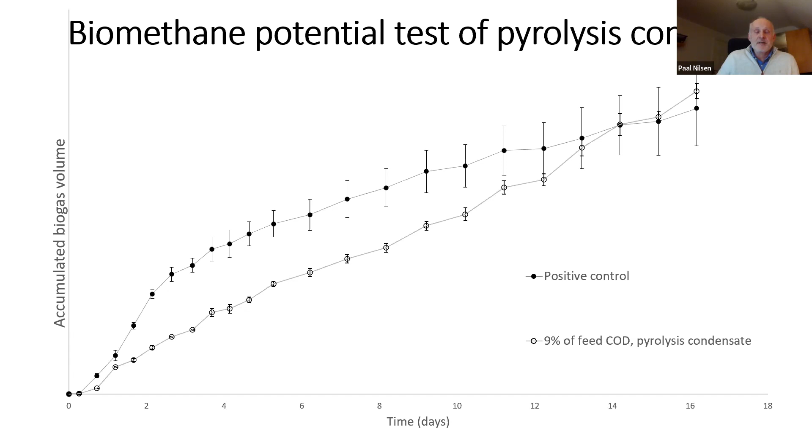I will be quick. We could convert a lot of these condensates to methane, which is very interesting. Now we are running the continuous systems for some time, and we are very encouraged by the results. So the synergetic effects of anaerobic digestion and pyrolysis with microbiology for converting the pyrolysis condensates back to methane is a viable route, which makes very much sense.

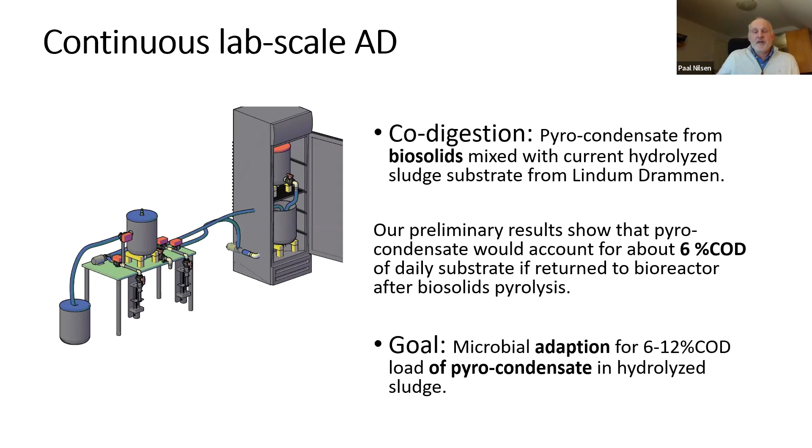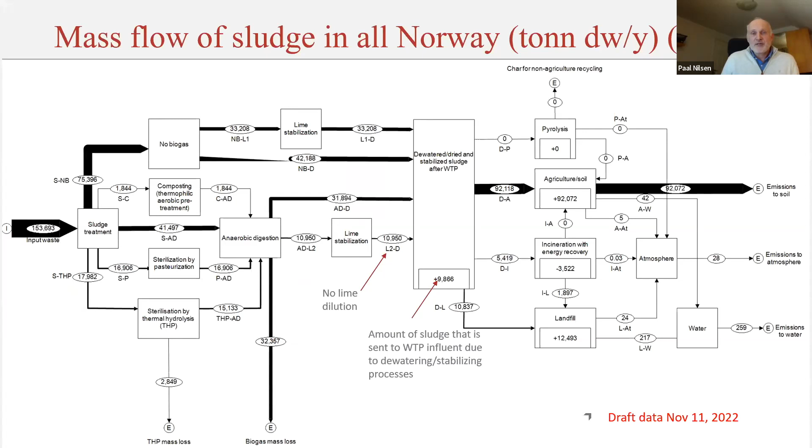One minute just to say that now we know all of these good things about pyrolysis of biosolids, what about the global perspective? Sludge effect with Hans-Peter Arp is a nice illustration of this. They have looked into the pollutants and the sludge treatment in Norway in total, very complicated, mapping all the treatment processes and mass flows throughout Norway. I think this should be done for any country.

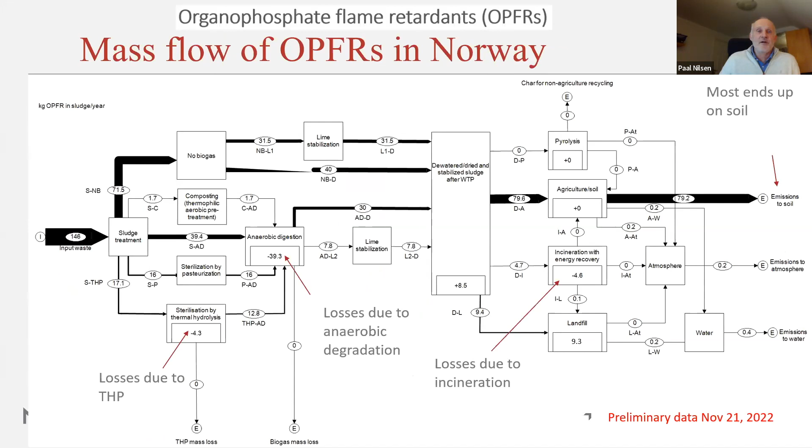They could also follow the same pollutant, like PFAS, to see what happens with it through the system. Then we could start to test some hypotheses, what happens if we are able to do pyrolysis, and then we could significantly reduce the environmental impact of these types of things. So this is also an exciting project to be part of, and I think these type of methodologies should be used widely.

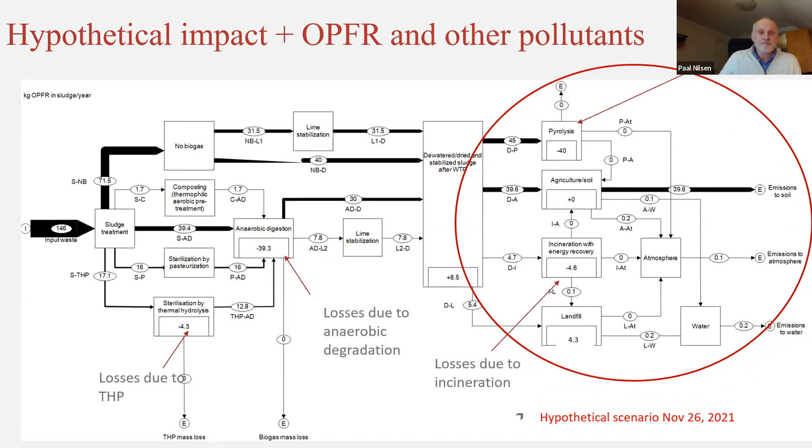So to sum up, we think pyrolysis of sewage sludge biosolids is important for eliminating pollutants. We need to know how to integrate and handle the sludges. And we also need industrial scale systems that could take the sludge flows from typical wastewater treatment plants, which we now have put in place and are ready to offer.

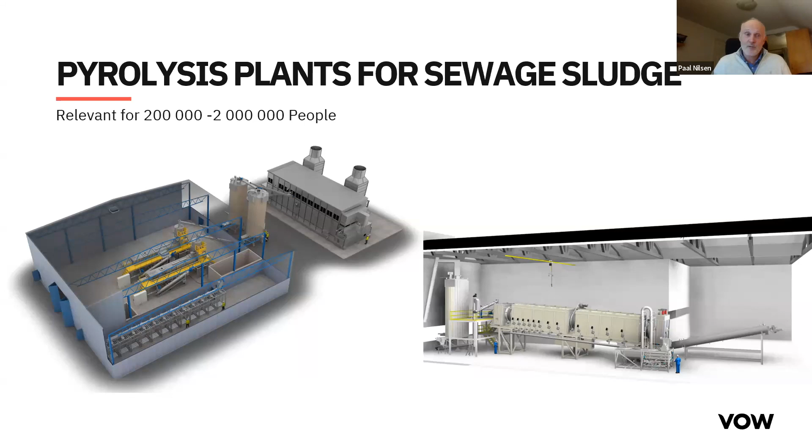But one thing, Gerard, Paul had a question about the cost comparison of the sewage sludge biochar versus the activated carbon currently used or used in the testing. It will be cheaper for sure, because the feedstock for the sewage sludge biochar actually comes with a gate fee. The wastewater treatment plant pays to get rid of it, to the extent of some $150 per ton of 25% dry solids. So they pay a lot for water.

So you have a nice gate fee, and the processing cost is not that bad. So I would say it is a very attractive business case compared to activated carbon.

Gerard, did you want to add anything on the efficacy, or the ability to regenerate, how many times you could do that, or any of that?